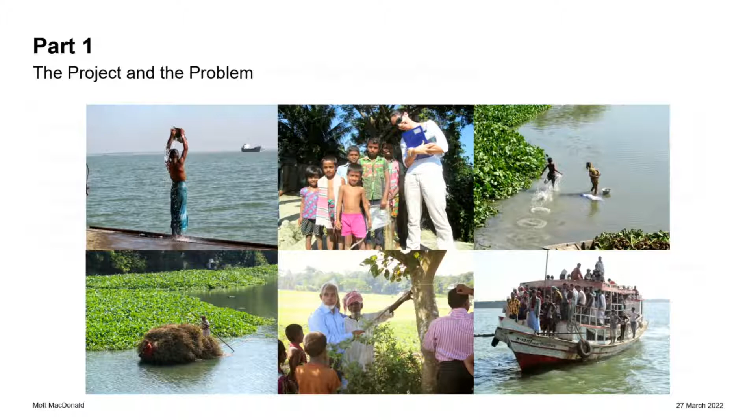I'll talk about the project first, and here are some photos from when I visited site back in 2013, to give a flavour of the countryside and the people. My favourite of these six photos is the bottom centre one, where we consulted the village elder, who showed us the level of the highest flood in living memory, which was used as a control on the hydrology and flood protection design for the project. We're not sure whether it corrected for the growth of the tree or not.

A little bit of orientation: you'll see Dhaka just to the right of centre in Bangladesh. This slide is from another project I've worked on, but I wanted to include it because it brings home the immense volume of water passing from the eastern and central Himalaya through the river catchments that run either side of Dhaka city. The river just to the right of Dhaka is the Meghna River, which is the source of water for the project.

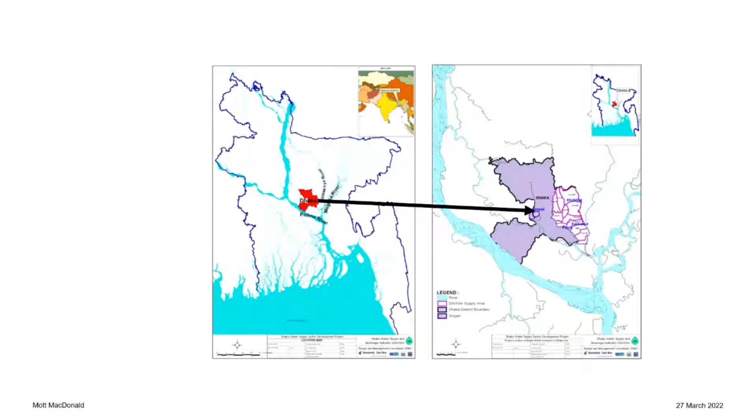Zooming in a little, the slide on the left shows Bangladesh with Dhaka shown in red, and on the right you can see in purple the supply zone for the client Dhaka WASA, with the lighter zone on the right showing the vast area Dhaka is expanding into eastwards.

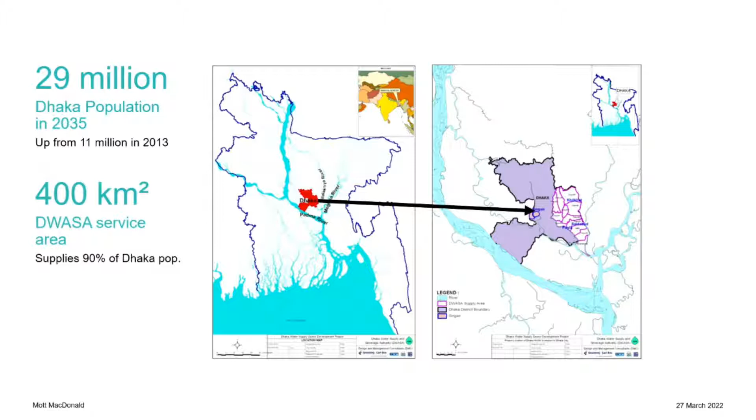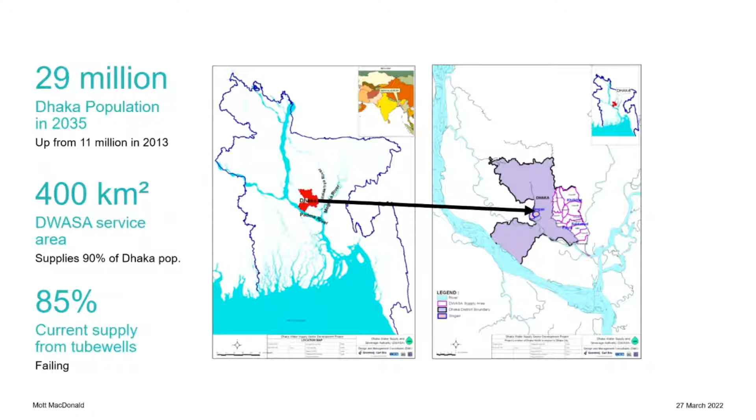The population of Dhaka is forecast to grow to 29 million by 2035, up from 11 million when I visited in 2013, and I can promise you it was busy enough when I visited then. The Dhaka WASA service area is 400 square kilometres, and they supply 90% of the population of Dhaka. At the moment, the water supply is predominantly from groundwater wells in an aquifer that sits underneath the city, and many of those are now failing either due to depletion of the aquifer or pollution of it.

So we have a short video that expands a little more on the background to the project and the social setting.

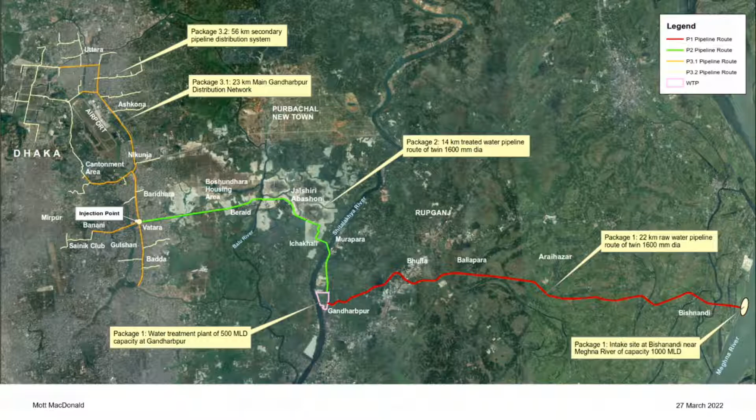Not going to dwell too much on this one. It's a satellite version of the schematic that I showed you - package 1 in red, package 2 in green, and package 3 in yellow. What I do want to point out here is the huge areas where Dhaka is expanding rapidly to the east. You can see all those light areas in the center left of the screen - huge amounts of hydraulic filling to get the land raised above the flood level for development and growth of Dhaka city.

Expanding on that a little more, if you look at the bottom two photographs, these are 5 years apart, and you can see the amount of reclamation filling that's gone on there. The two above show similar huge amounts of filling, but also you'll see how that filling and the evolving development plans over those 5 years actually made large alterations to the alignment of the pipeline. The magenta on the left was the original, and the red on the right is the final.

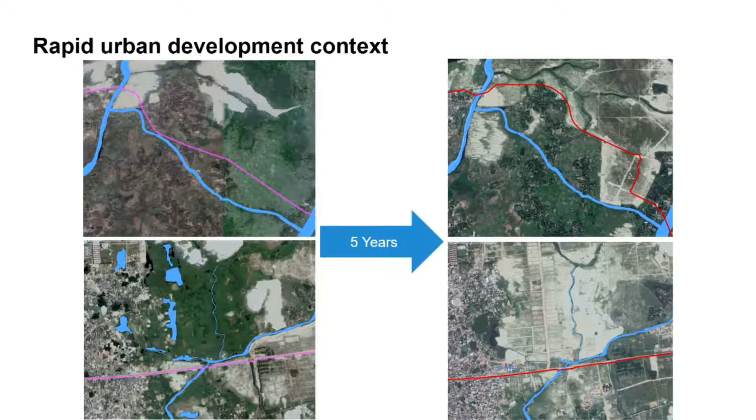Within package 2, there are 2 tunnel river crossings and shafts. These are standalone design and build packages, and we'll not be talking about those today, but there's lots of really interesting engineering, not necessarily seismic engineering, in those shafts and the tunnels.

Package 3, won't be talking too much about that this evening, and that's because Dhaka city is where Dhaka city is, because of something called the Madhupur clay and the Dupi Tila sand which is beneath it. The Dupi Tila sand is this aquifer that I referred to that supplies the groundwater and has done since Dhaka was first established. But because of the clay on top, the liquefaction risk for almost all of package 3 was found to be low. So won't be talking much about package 3 either this evening, just package 2.

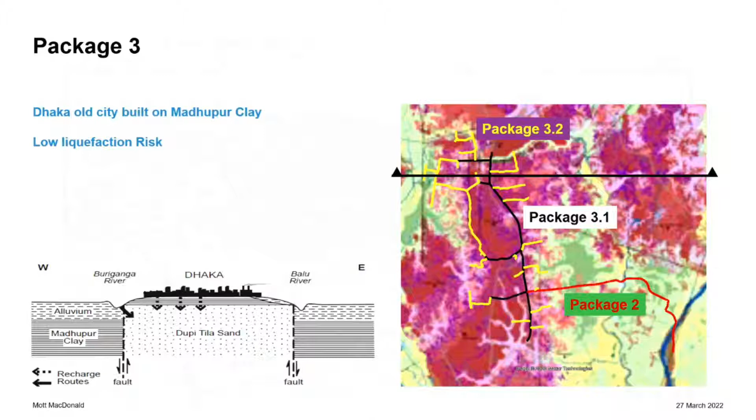So within package 2, what are we doing? Well, it's the twin pipelines I've already referred to, but they're buried within a trench excavation, which, because of the space constraints, will almost exclusively be in a sheet pile cofferdam. As the ground engineers for the project, we had to get the information to support the temporary works design of the sheet piles and also the dewatering.

Within the pipe, there's a trench backfill, so selection of suitable materials for pipe bedding and for general backfill. There's a real scarcity of any soil much coarser than fine sand within Dhaka, just because of where it sits in the delta flowing out from the Himalaya. So we had to specify the pipe bedding and backfill materials very carefully.

Ductile iron pipes are subject to corrosion, so we had to assess the corrosivity of the ground and the chemical nature of the ground to allow the pipes to be designed for the in-ground corrosivity. And last but by no means least is the liquefaction mitigation that we're here to talk about this evening - of the pipes, but also the pertinent infrastructure, air valves, washouts and the likes.

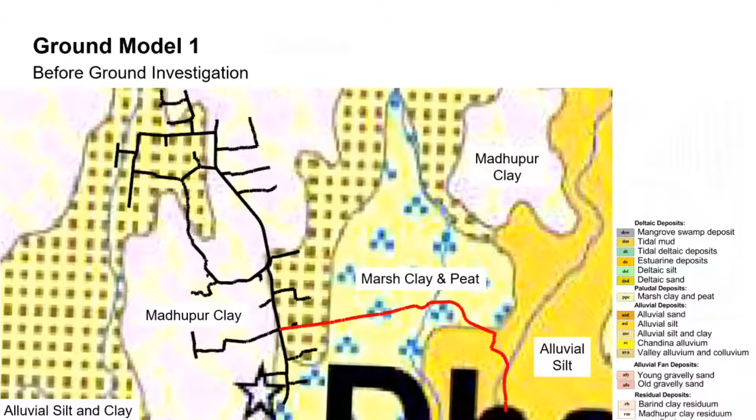In terms of the ground model, when we started out, we had almost nothing to go on. This area was almost completely undeveloped. What you're looking at is package 2 and package 3 overlaid on the geologic map of Bangladesh, which shows us the Madhupur clay and alluvial deposits, and tells us they're all Pleistocene in age, but not much more than that.

There's also a geomorphologic map, which is much more granular and detailed. Again, you can see the Madhupur clay in purple and the alluvials in green and brown that we were dealing with. But all we knew was that we would have sandy, silty soil to deal with.

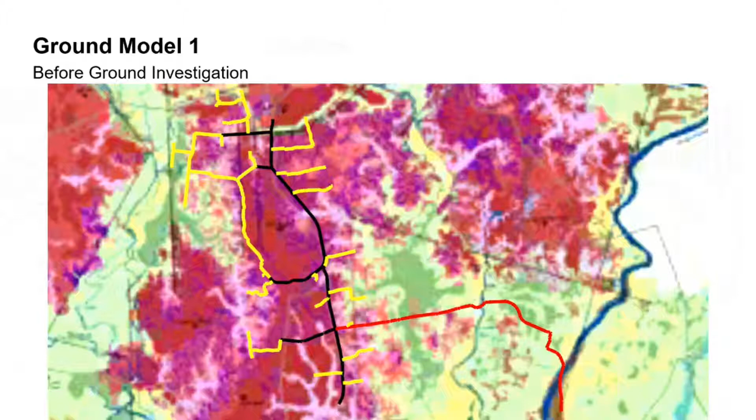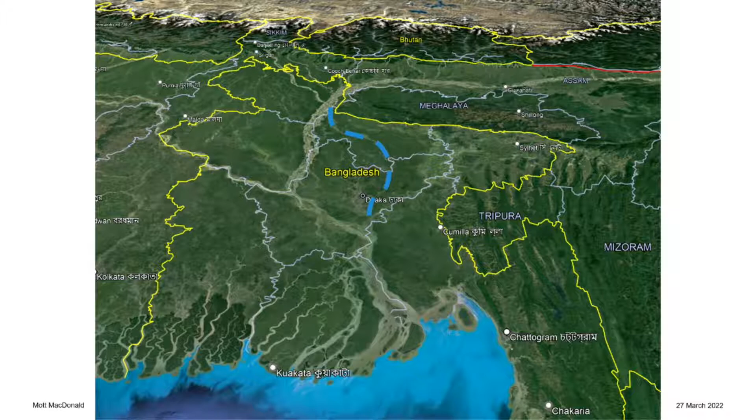I really like this Google Earth view into Dhaka because it shows the extent of Dhaka prograding from the Himalaya down into the Bay of Bengal. You can also see the Brahmaputra River, which currently passes to the west of Dhaka, used to go to the east of Dhaka. One morning everyone woke up and the Brahmaputra River wasn't where it used to be—it switched channels literally almost overnight.

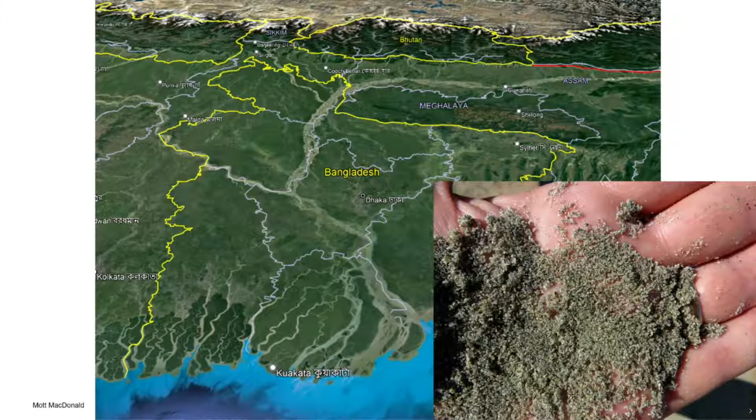What we were able to do—there's a picture of the typical material. It's a silty, fine sand with lots of muscovite and biotite mica in there, so it's quite a greasy feeling sand. It's not a great material at all.

Across that old Brahmaputra alignment, we managed to find a cross section in a paper, which pointed towards this pattern of an upper sand unit, a lower sand unit, and a mud unit in between the two. That became the basis of what we were expecting to find within the project area.

But obviously that wasn't nearly enough to go on to start doing any sort of serious seismic analysis, so we had to do a ground investigation that met the state of the practice within Bangladesh. We tried getting interest from international contractors to do something more advanced, but there wasn't really the appetite for international contractors to set up site investigation businesses in competition in Bangladesh.

So we went with the local market and had some pretty state-of-the-practice investigations by way of boreholes, SPT, permeability testing for temporary works design and the dewatering assessment, assessing the strata, getting grading curves of the uniformly graded fine sand, index tests on the clay deposits, and some shear box and triaxial tests to get shear strength parameters.

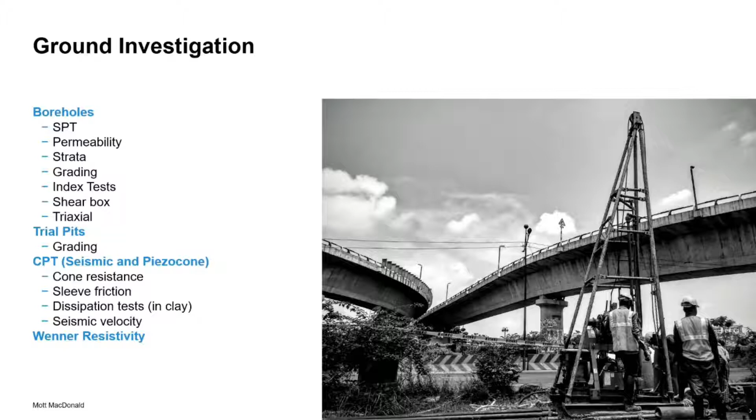So some stats: we did 36 boreholes, 34 trial pits, 19 Wenner arrays, and 111 CPT tests.

If you were fairly generous and said 3 days for a borehole, that would be a 4-month fieldwork period. If you were extremely generous and said 1 day per CPT, that would be 4 months of field work. 34 trial pits you'd definitely be able to do in a month, and 19 Wenner arrays again about a month's work. It actually took 6.5 months, and that was because of the problems we had with the CPT and the lack of experience and expertise.

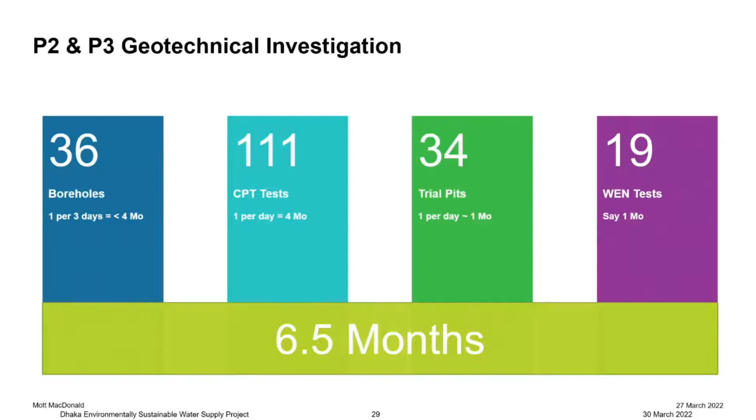We were having to do a reasonable amount of upskilling of the contractor to make sure that things were done right.

So just a quick refresher, this was the ground model that we had from what we could do, an upper and a lower sandy layer with a mud layer in between.

And here's what we found after our site investigation. So this is all of the holes and CPTs of the site investigation, with a water treatment plant, Gandapur, on the right-hand side, and the injection points at Norton Bazaar at the left-hand side. You can see that we found an upper loose sand layer, a middle clay and silt layer, and a lower dense sand layer. So it was really reassuring to see that at the grand scale, at the whole pipeline scale, we've got the ground conditions that we were expecting, although obviously there's detail within that picture.

Zooming in a little bit closer, these are the drawings that we produced. You can see the upper and lower sand layers in green and the middle mud layer in sand.

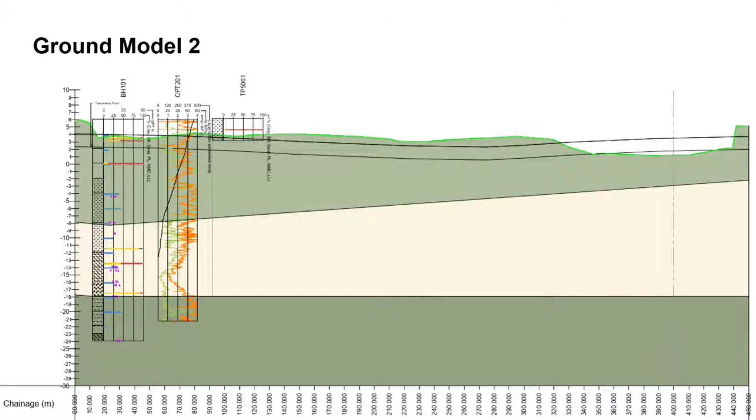Zooming in on the detail for the boreholes, the blue lines are the SPT, and you'll see all the SPT below 25 in that upper sand layer. The red, amber, green are the particle size distribution: green is clay, orange is silt, and red is sand. The circle, cross, and triangles are the Atterberg limits and moisture content. So we were able, at a glance, to get a really good feel for the conditions in the ground, and obviously you can see here that upper layer is really quite loose.

On the CPT, orange and green for cone resistance and skin friction, but also we plotted the calculated liquefaction settlement. Barnali will explain how we got to that in a moment.

We had a version of this on the office wall where we had the whole 18 kilometres of pipeline on a single cross section with all the liquefaction settlements shown on it, so that we were able to draw lines on with a big marker pen. I'm a great fan of doing things with marker pens on walls, as well as doing great things on the computer. So there you go.

That's my introduction to the project and to the ground conditions. I'm going to hand over now to Barnali to talk about the stuff that you're all actually here for, the seismic engineering.

Thank you, Jim. Really great to be back at ICE and present in person. Jim has already said that we have 100 people online, so at least people are listening to us. So the question then came, is Dhaka seismic?

Do we have some seismic challenges? This project was particularly very close to my heart for two reasons. My mother originally was from Bangladesh, but after the displacement that happened when the country was formed, she left her family and went back to India. So when I got a chance to travel to Bangladesh, it was for personal reason as well, as I could see my mother's side of the family and look at the land from where she came from.

So now coming back, starting to look at the seismicity of Bangladesh. Important to note here that from a tectonic point of view, Bangladesh is actually covered by three tectonic plates: the India plate, the Eurasian plate, and the Burma plate. The India plate is potentially moving at about 6 centimeters towards the northeast, whereas the Eurasian plate is subducting at about 25 millimeters per year. Similarly, the Tibetan plate is also subducting. So basically, the faults, if you look at the map on the left, you'll see Dhaka is fortunate in a way that there is no major fault line passing through Dhaka.

But it does have three major faults which are very important, to which I draw your attention. One of them is called the Dauki fault, which runs from east to west. It's about 300 kilometers long.

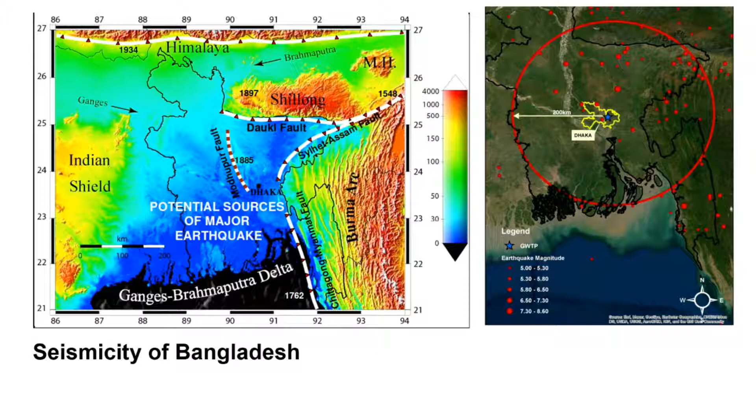But the problem was that some of these further events were felt in Dhaka city, and the record keeping was very poor. There was no proper catalog that you could use to do a detailed seismic hazard assessment study. The information to do this kind of study was lacking, and we're talking way back in 2014-15 when this project started. We were really struggling with quality of information at that point.

So we said, okay, let's look at what the Seismic Code of Bangladesh says. The Seismic Code, BNBC, was actually updated in 2012. According to that, Bangladesh is divided into 4 category zones: Zone 1, Zone 2, Zone 3, and Zone 4. Each of these zones is associated with a zoning factor. Dhaka falls in Zone 2 with a zone factor of 0.2 G.

Now, what this zone factor means is slightly different from seismic hazard in IBC or other codes. The zone factor is essentially associated with what they call the maximum credible earthquake, and the design basis earthquake based on these codes is about 2/3 of the maximum credible earthquake. So essentially the design criteria is that you design for the DBE, because it's an infrastructure project. There's no dual level design, mostly designed for a 475-year return period, if you consider it equivalent to Eurocode. That was what the code was telling us.

The code was last updated in 2012. We started looking at this from 2013-14 onwards. Recently there's also been some probabilistic seismic hazard assessment studies. The most recent one is the Zillur study in 2019, where you can see in this map there's 10% probability of exceedance in 50 years, so a 475-year return period. Most of the bulk of that is within 0.1 to 0.2 G, or slightly between 0.1 to 0.15 G. These are bedrock accelerations.

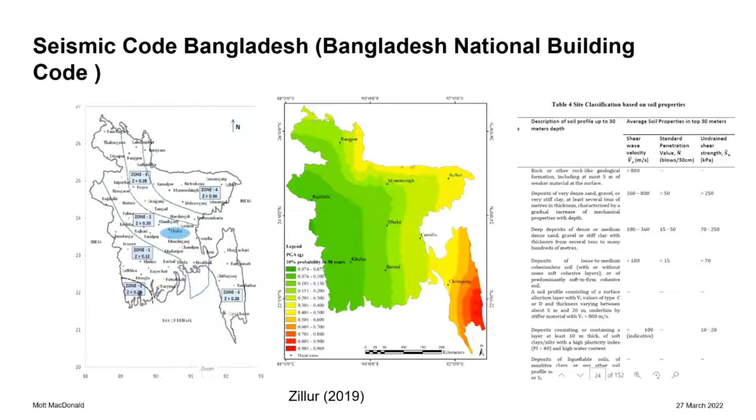So this gives us confidence that, at that time, the project requirement was to use the Seismic Code of Bangladesh, but we did a fair bit of desk study. Similar to that, following the seismic code, the next important thing is site classification, known as site class A, B, C, and D. This is very similar to Eurocode, classified based on the average shear wave velocity at the top 30 meters. For most of our site classifications, we are at site class D, where we have a Vs less than 180 meters per second.

Initially, before we started the project, there wasn't much discussion about liquefaction in Dhaka. The only reason I became aware of liquefaction in Dhaka was I'd heard about what happened at Jamuna Bridge, where there were some foundation reassessments because of liquefaction. So early in this project, I met the project director from Mott MacDonald and asked him, have you considered liquefaction? He said no, nobody has mentioned liquefaction to us — in this project documentation, there is no liquefaction. And that's how the whole process of investigating liquefaction started.

Then I started looking at the site investigation data, and what I was seeing was making me very concerned. Generally, for a typical liquefaction assessment project, many of my colleagues will know you can do it via SPTs or cone penetration tests.

You can look at cyclic simple shear tests, cyclic triaxial tests, resonant column tests, and in many cases, which we do routinely, we go for very advanced models in software like FLAC, Plaxis, LS-Dyna, Swandyne. We can do a lot of things when you have the data for liquefaction assessment. This is all very good.

But here we are in a country where people have no concept of liquefaction. They've built all these structures. There's not much infrastructure work that's happened. So in such an environment, how do you begin the dialogue of liquefaction? That's the kind of challenge.

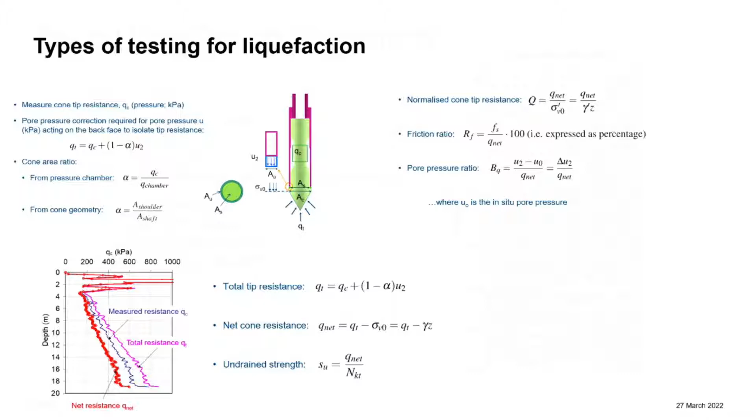We tried to schedule some cyclic triaxial tests, but again here the country context comes into play. None of the local facilities we visited had the facility for doing cyclic triaxial tests, so we would have had to import samples. So at the moment, we just went with the CPT tests.

This is the typical CPT. As Jim already showed you, we had about 111 CPTs. So here is again where your digital and your data matter, because it's one thing to collect so much data, and the second item is to discretize all of this data and understand what it's telling us.

I'm showing you one example of typical CPT data where you can see the cone resistance. Now remember, we are not trying to build deep foundations here, just pipelines, trench pipelines, with a maximum trench depth. You're interested in about 5 to 6 meters of the ground, and in that 5 to 6 meters we have that loose upper sand, which is the problematic sand for us, if you remember the ground model Jim showed us.

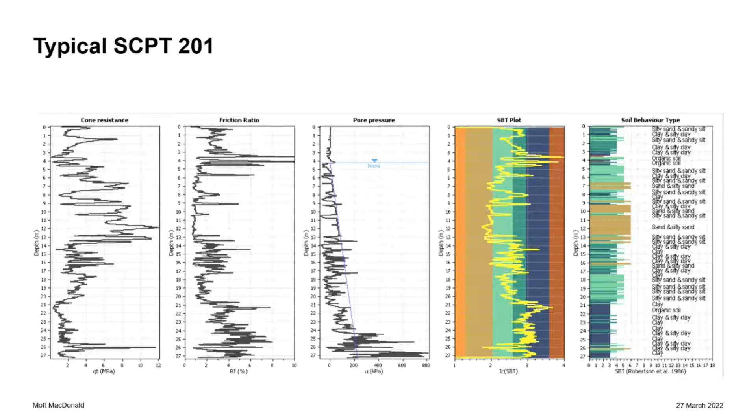At the top layers we generally had very low QCs, less than 2 MPa. The soil behavior index, using Robertson or similar classification, was particularly silty sand, sandy silts. That was the kind of classification we were getting. So not really an easy material to characterize.

We did liquefaction assessment through lots of spreadsheet-based methods, but in the end, because we had a lot of data, we decided to use the software CLiq. Whenever we used the software, we also made sure we did our own due diligence by calculating by hand and cross-checking all of that.

But in reality, what you are seeing here is a factor of safety. Liquefaction assessment is typically done by finding a factor of safety, and you typically want a factor of safety greater than 1.25. But all the bits in red here are telling you that the top 6 to 7 meters is liquefiable for this particular site we picked up.

The liquefaction assessments were typically done for a magnitude 7 earthquake. We also did sensitivity for magnitude 6.5. The peak ground acceleration is one of the inputs for our liquefaction assessments, taken as 0.18 G. The numbers in the code were for MCE, and design checks were done for the design basis earthquake, also accounting for soil factors, so the PGAs were approximately 0.18 G.

Because we also had shear wave velocity measurements, we could classify the site, and most of the site was classified as site class D. The important point to note here was the CPT data.

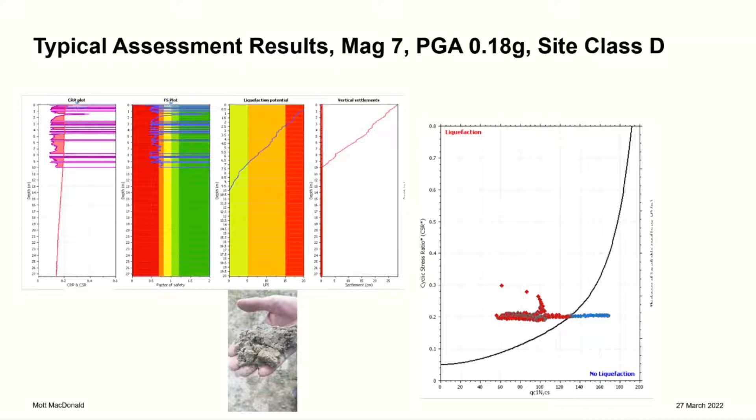I like this photo, mainly because looking at it, it's quite difficult to say, is this going to liquefy or not? It's just not one of those obvious ones.

This is very scary - this is what I used to scare everyone in the project. You can see we had about 43 of these CPTs in P2, and this shows the probability of liquefaction report. Most of them, almost 75%, were showing a probability of liquefaction more than 80%. Whereas only some people who were still doubting said, oh, the bottom ones, the green ones which show low probability of liquefaction, that was about 12%. So that was the number I was asked - how many don't show liquefaction? And if you're looking at the image, that's the overall probability for liquefaction. So that was bad news.

Then we said, okay, let's not panic. We had to calm the project team, the huge project team. Our strategy for trying to calm the project team was to look at the liquefaction-induced settlements and the differential settlement across the route. So what you see here, the image on the left is actually the liquefaction-induced settlement for all these CPTs, with the knowledge that these numbers are okay following best practice, but they still are not the main truth or the only source of truth.

We marked the areas with big reds where we knew that out of the 14 kilometers, we had to do some interventions. We cannot have the pipeline and the trench there. And then we looked at all of the different possible cases - how could we do 14 kilometers of liquefaction remediation? It's too much. So we had to come up with some optioneering, which is what I'm going to focus on.

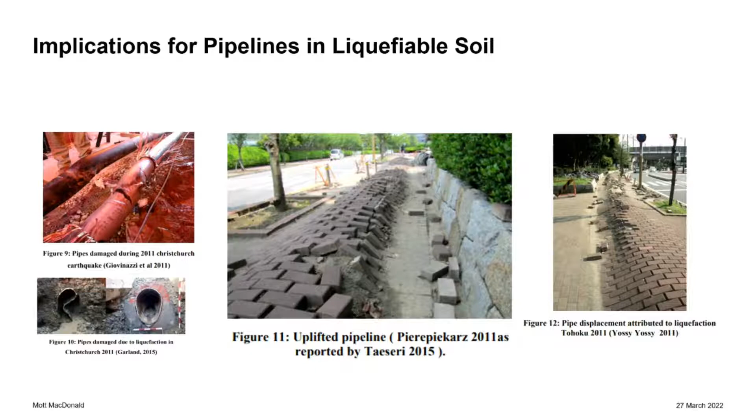So that was the time to go back and look at ground improvement for liquefaction. There's a huge range of methods for ground improvement for liquefaction. You can look at densification, where you have vibroflotation, vibro-rod methods, dynamic compaction, compaction by explosion, compaction grouting. Then the other part is reinforcements - stone columns, compaction piles, deep soil mixing - all of these are quite popular, and the first choice is stone columns. Then you go to more sophisticated ones - permeation grouting, hydrofracture grouting, jet grouting, compaction grouting. And the last solution, one of the most dramatic liquefaction solutions which I recently saw in one of my other projects, was everybody said the problem in liquefaction is because of the water table.

Just lower the water table. So they were considering lowering the water table for the entire city because they wanted to reduce the risk of liquefaction, which I thought was extremely extreme.

But then the other option is drainages. In many places, people are considering drainage, actually trench. So looking at all these four options, we said okay, there are a wide range of methods, but what is suitable for our site? That's where it comes down to what is suitable for the particular site where you are working, and the country and context. I'll talk about this in a bit of detail.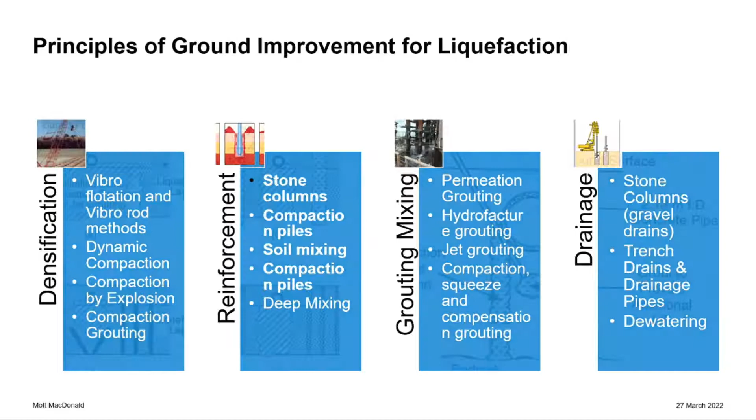Also, we try to look at, are there any case histories where you have pipelines in liquefiable soil? What has been done before? What is in the published domain? Looking through vast troves of literature - there may be more now. Remember, this was done in 2014 and 15, so there might be more cases now.

But generally, people have kind of tried to form a bridge where you can have a soil cement wall, stop the liquefaction, where you have the pipe, do some sort of ground reinforcement below the pipeline, and normally use some compaction grout. Those are the kind of solutions which are available in public domain.

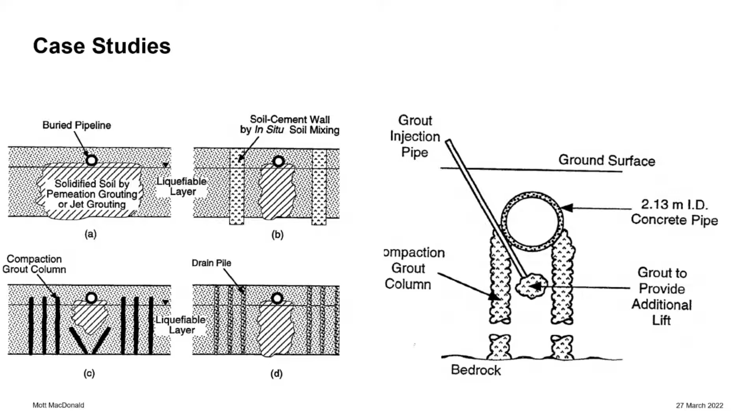What have they done in Bangladesh? Or did they have any experience? So this is what we found, that sand compaction piles has local experience in Bangladesh, because there was this problematic project in Bangladesh, the Padma Multipurpose Bridge Project, which if you Google, you will see that project ran into a lot of problems. One of the methods of ground improvement that was tried in that project was called sand compaction piling.

So why SCP? Because as Jim mentioned, they have got lots of sand, so they don't have to transfer the sand. It's locally available material, so it's kind of useful. And there was some very good case histories of this, which was seen in the Tohoku earthquake.

In the picture that I have on the left, you see an improved area and unimproved area. Anybody who works in ground improvement, they always want to show this picture, because obviously the improved area was on SCP's sand compaction piles, and nothing happened to that after the Tohoku earthquake, whereas the other area where nothing was done - so it's a good one.

So typically the sand compaction piles are used for clays, and it can be used for sands. It has been popular in Japan, very, very popular in Japan. In fact, there is a book which I'll just talk about, which deals with sand compaction piles. For sands, it's mostly used for increasing the bearing capacity, for reducing the settlement, and for preventing liquefaction. These are the main bits where it's used.

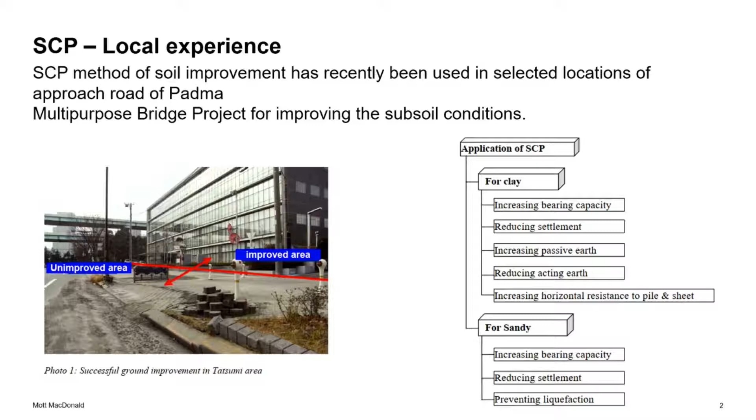I think many people in the audience, or people who have seen SCPs, might know this particular slide. This is from the book that I was mentioning - Kitazume's 2005 book on sand compaction piles. He has accumulated all the case histories of SCP usage, and most of these usages are actually coming mostly from Taiwan, Japan, and the high seismic areas.

I will not go into detail, but it's important to say that while this method - if you are coming to very, very stiff soil materials, then obviously people also use air. The air is used to break up the surrounding materials. In a selected way, sand is pumped into this, and the sand compaction piles are created.

Typically, the design of sand compaction piles follows the same principle as stone columns, and you use what is called the area ratio - how much of the soil you want to replace by your sand compaction piles - and you have the spacing of the piles.

Any such type of testing needs - ground improvement is obviously something you need to test on the site before. So one of the things that we specified was that if we thought sand compaction works in the site that we have, then we also specified that prior to using it on site, there should be a test trial to know the effectiveness. This is usually done by measuring - because it came from Japan, they put a lot of emphasis on the SPTs - so this will come from measuring the SPTs before and after the SCPs. Normally the diameter of the sand compaction piles is about 0.6 meters, that's the kind of 0.5 to 0.6 meters. You're actually reinforcing the ground, allowing liquefaction pressures to dissipate, more excess pore water pressures to dissipate.

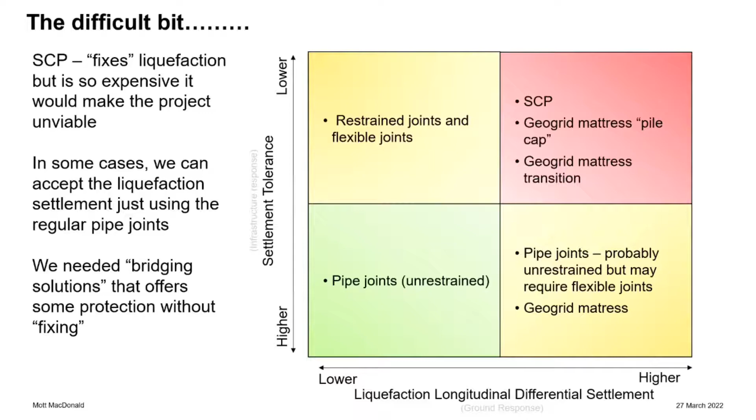And this chart became quite famous, because what we're trying to do in this chart is show where along the entire length of the pipeline we are going to do some interventions.

We said, what is the maximum differential settlement that can be tolerated by restrained and unrestrained pipes? We put a limit of 250 millimeters. In reality, they can tolerate more, but we had to cap it somewhere. This 250 millimeter limit is generally applicable for long continuous pipes which are not connected to any hard spots such as chambers, shafts and others. But where we had chambers or areas connected to hard spots, we limited it to 100 millimeters.

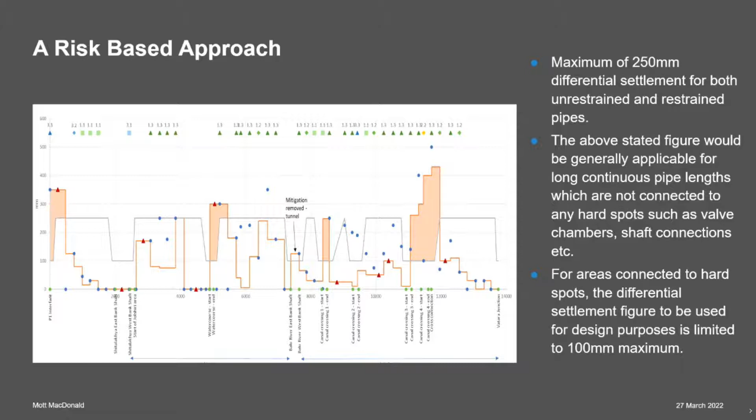So obviously we had to come up with a decision workflow. At the time we were delivering this project it wasn't simple, but the main question was: is the pipe restrained? If not, are residual movements manageable within the angular deflection of the pipe joints? If yes, no further mitigation required. If not, we need to do geogrid mitigation.

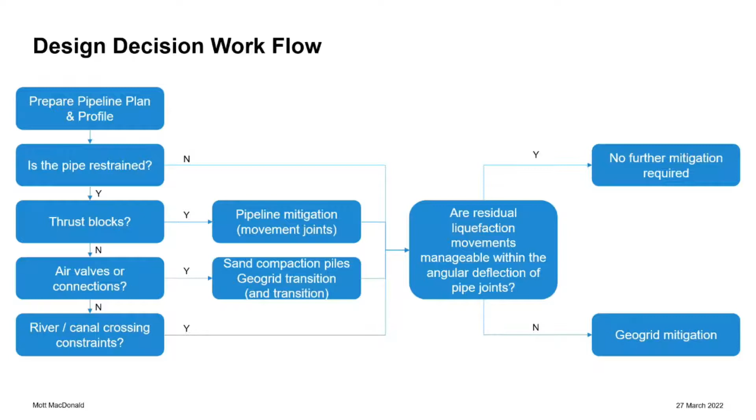This is quite a detailed one. We don't want to go through everything, but essentially there is a logical manner in which we develop the solutions. So just going to talk about the first one: is the pipe restrained? If not, what happens then?

If we have unrestrained joints, accept liquefaction settlement, we're just using regular pipe joints, because pipes on their own can deflect. For example, if we have a 100-meter pipe length, peak ground displacement at the center of 400 millimeters can be accommodated by the pipeline without loss of any containment, because remember, we are using ductile iron pipes which can deflect because of their shape and tolerate a little bit of settlement.

So if it's within that limit, we allowed it. For liquefaction design, we assume the target settlement figure is maximum, as I explained earlier, about 250 millimeters. So for these bits, we didn't have to do anything, we automatically made use of the properties of the pipes we were working with.

The second one is the question where we have to do pipeline mitigation, through movement joints. Here again, we started looking at each section of the pipe, which requires a thrust block to be restrained. Then there's a movement joint fitted at each end of the restrained section to manage differential settlements to a tolerable limit of 100 millimeters.

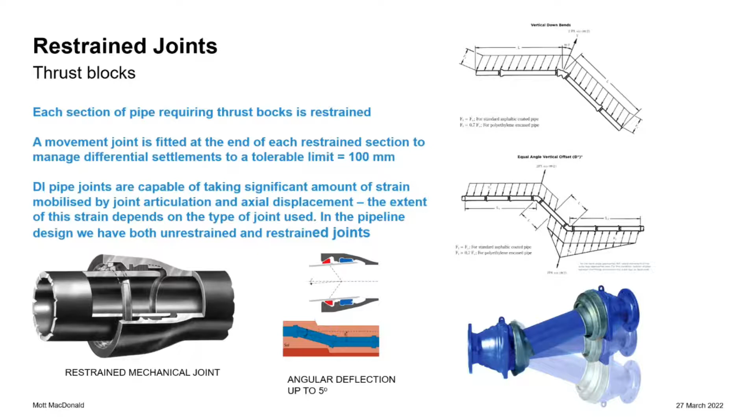We know that the ductile iron pipes are capable of taking significant strain mobilized by joint articulation and axial displacements, and the extent of this depends on the type of joint used. In the pipeline we decided to have both unrestrained and restrained joints. So taking the inherent ability of the pipelines and the restrained joints and movement joints, we made sure that this liquefaction induced movement is actually absorbed by the pipeline in the design.

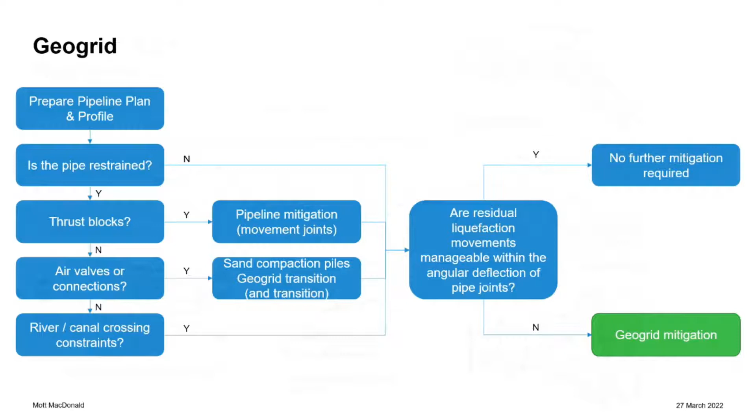Now, what about the geogrid mitigation? Geogrid mitigation was our second order solution. The standard geogrid reinforced mattress, this is Jim's favorite solution, provides tensile strength to the base of this.

So we have twin pipelines, and then we have the geogrid at the bottom. Remember, we are trenching everything, and once we trench this, we also have some geogrid wrap around, which provides tensile strength to the sides and also pull-out resistance for the base. So we wrap it around with the geogrids. The geotextiles prevent the migration of the backfill into liquefiable soil, providing a bit of confinement. If the soil below does liquefy, it is contained within this.

So this was a standard geogrid detail, and it's quite an easy solution because ultimately this pipeline is going to be built by local people with local expertise and local skills. Laying down lots of geotextile wrapping is easy, rather than trying to do something very sophisticated, which probably brings a lot of problems.

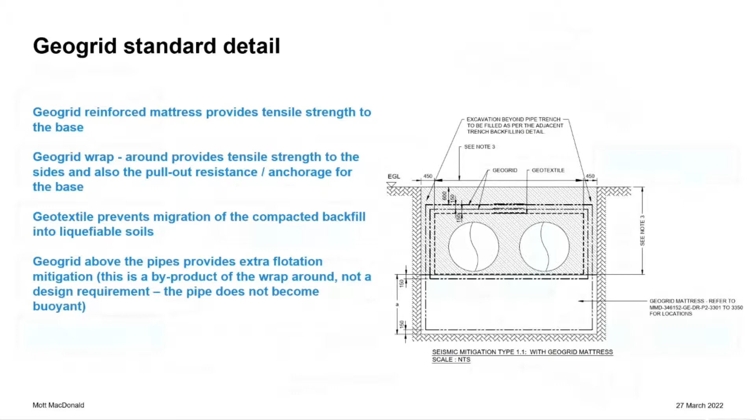Then comes our standard sophisticated solution, the sand compaction piles, which we used for air valves and other places where we had hard spots, and around transitions, because we can't go directly from the geogrids into the sand compaction piles. We also needed a barrier of transition to manage the liquefaction in the surrounding areas. So in this case, the standard solution that you saw in the geogrid all remains.

In addition to that, we have the sand compaction piles. We designed the sand compaction piles, mostly 600 millimeters in diameter, with a spacing of about 1.5 meters. But at local places where we were doing the transition, we had the sand compaction piles at a larger distance.

The geogrid mattress from this becomes the pile cap to support the block of the pipe and engineered fill above the sand compaction piles.

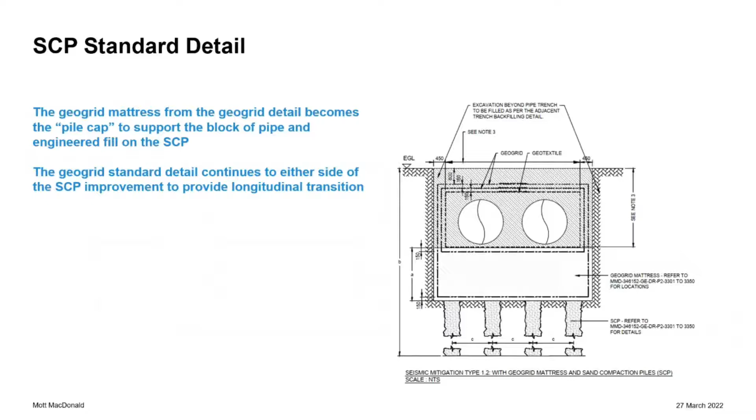So basically, the geogrid standard detail continues on either side of this to provide the longitudinal transition. We didn't just do it at that area and leave the sides, because from past experience of liquefaction, we've seen when you do ground improvement for one location and leave the sides, it fails, and that creates an imbalance in the entire system. So we wanted to avoid those kinds of sudden jumps or hard spots.

This is the kind of drawing that we issued. Ultimately these drawings will be used to design, to look at what sort of mitigations we have. For example, we've classified the mitigations 1.1, 1.2, what kind of mitigations we're giving, what is the dimension, how far do you extend on either side of the mitigations, and what is the liquefaction-induced settlement. Everything is there in the drawings, so we spent a long time doing them so they could become useful.

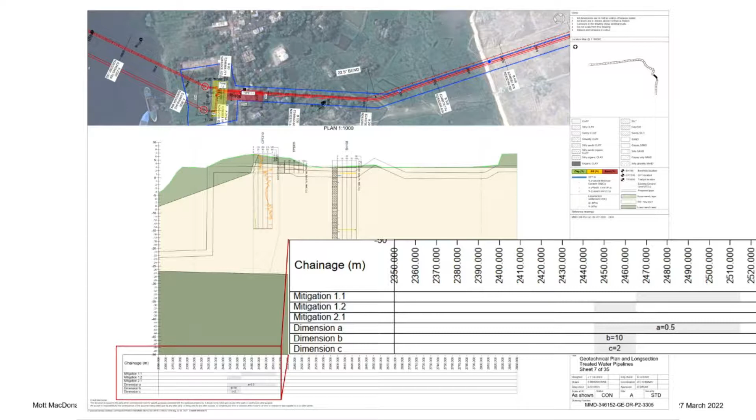Ultimately, we ended up having mitigations for those areas where we had hard spots, some areas where, if we had to do Barnali Avenue which we'll explain later, were complicated. We decided this carefully, because remember, none of Dhaka has had any liquefaction mitigations before. So if the surrounding areas are not mitigated, that's not very good for us either, even if we've mitigated our own site.

So we've talked about a lot of things for you to absorb, but it's easier if you have some cartoons, because the cartoons will actually show it. So we're just going to show you one very nice video, and I don't have to do any talking.

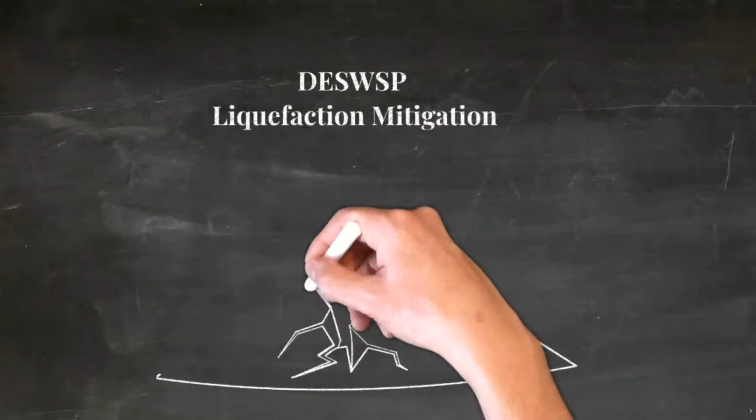This video short describes the design of measures to mitigate the effects of liquefaction of the soil for the pipelines of the Dhaka Environmentally Sustainable Water Supply Project.

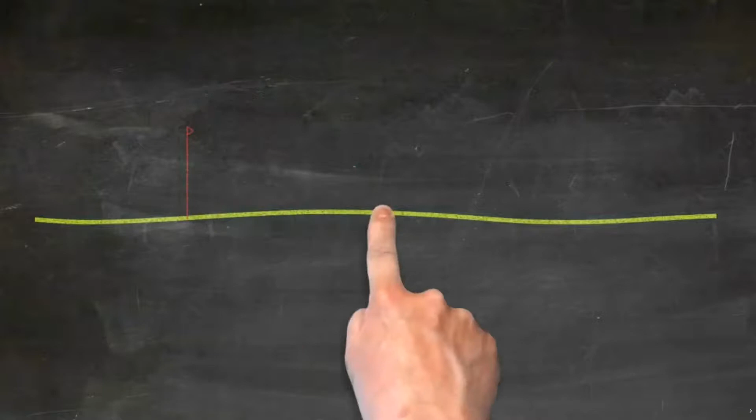The first area looks at Barnali Avenue, where the pipeline will be installed at the toe of an existing embankment that carries the road Barnali Avenue. The site boundary is very close to the road, and there is a zone of liquefaction that the seismic estimation has shown will be between about 3 to 5 metres thick.

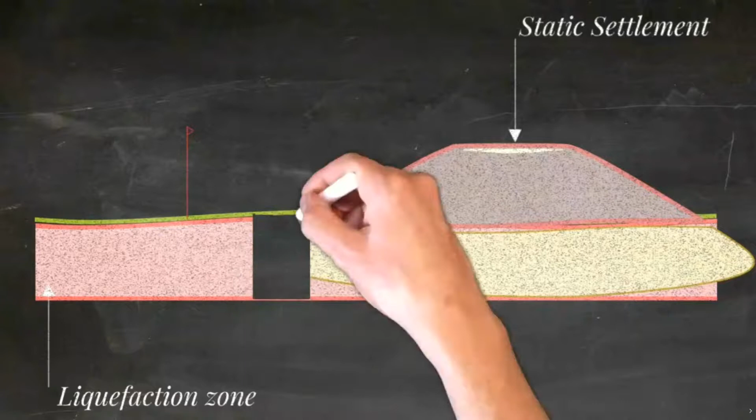The road at the moment is on an embankment around 5 metres high, and the soil beneath it will have undergone some static settlement, but no dynamics from the earthquake. As far as we know, no measures were installed to mitigate the effects of liquefaction for that embankment. The new twin pipeline will be installed at the toe of that embankment.

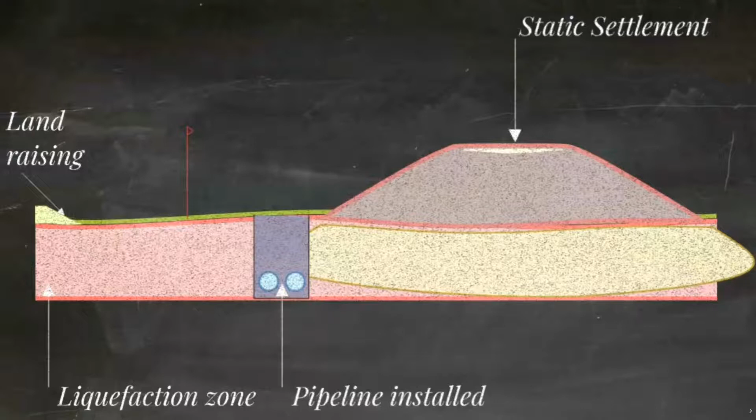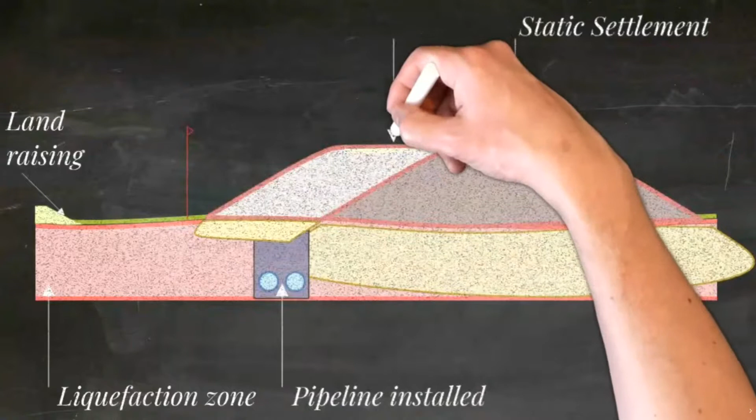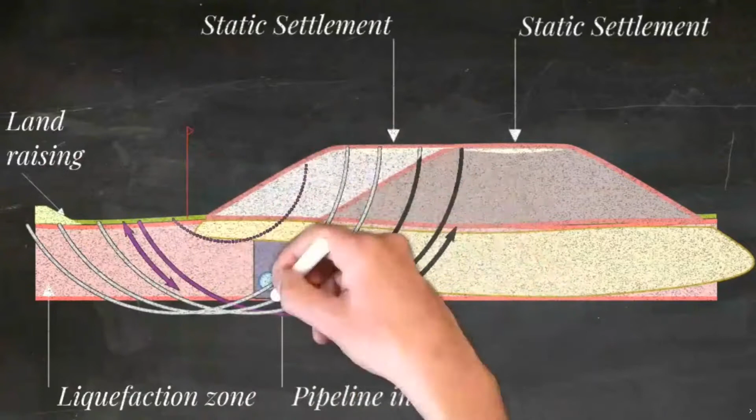The main problem will be an earthquake during the period where the Barnali Avenue fill loads the liquefaction zone and results in shear surfaces as shown. These would take out the pipeline, although that will be mitigated in the long term by counterweight fill as the land filling reaches the embankment.

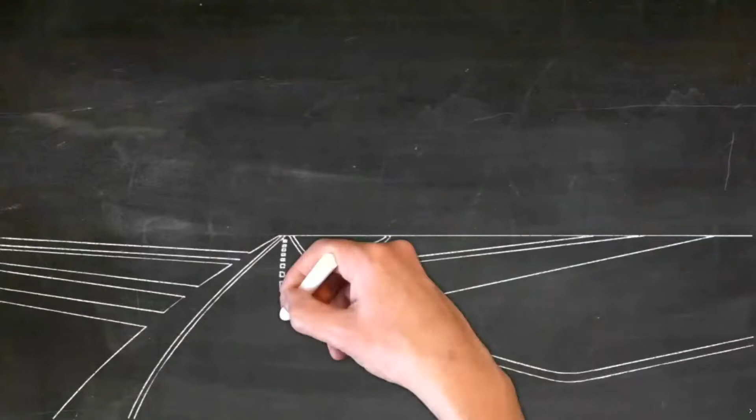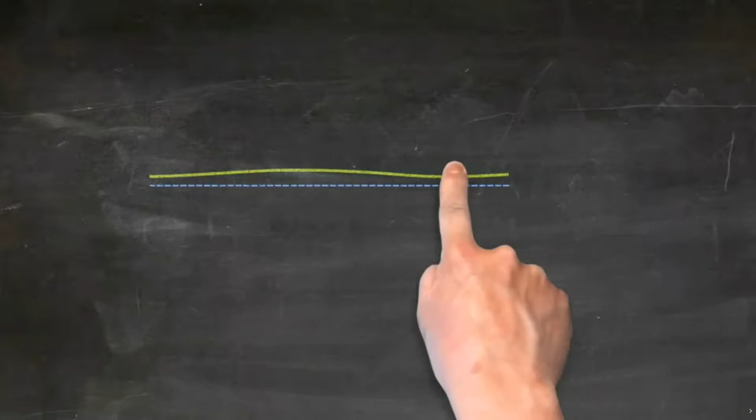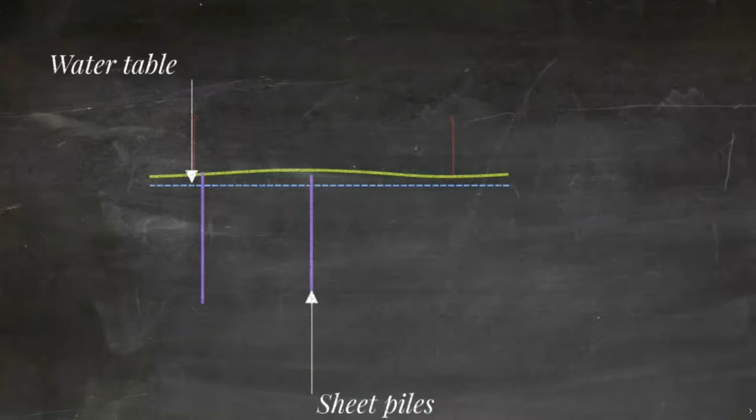As well as Barnali Avenue, there is also general trench construction, which includes phase 2 of the works. Here, the pipe is excavated below existing ground level with no fill to either side. Water table is typically very high, and because there's a narrow corridor for construction, the pipeline will be installed in a temporary excavation supported by sheet piles. Those sheet piles will be supplemented by dewatering wells in order to draw down the level of the groundwater below the required excavation depth.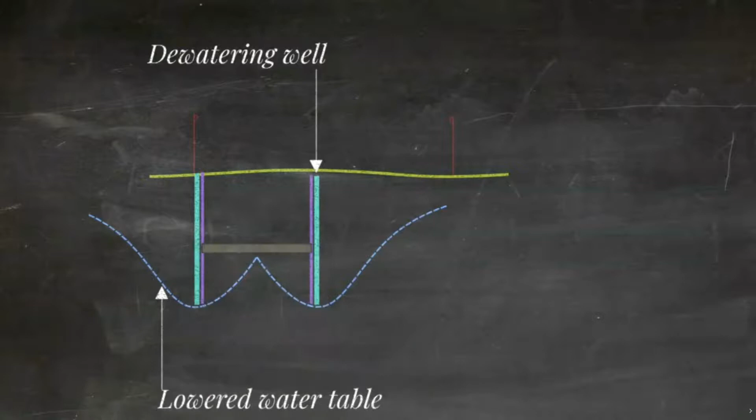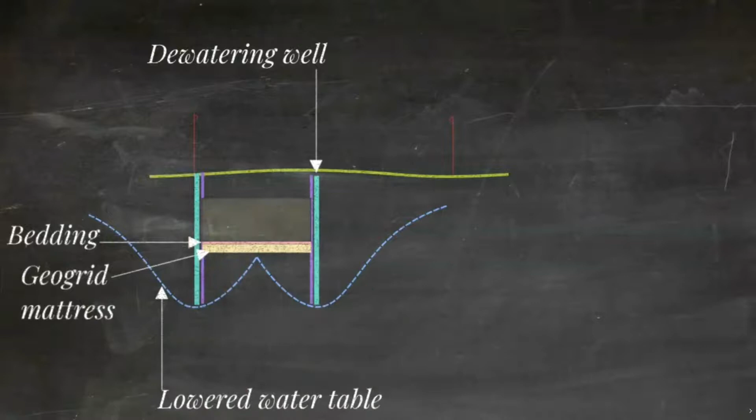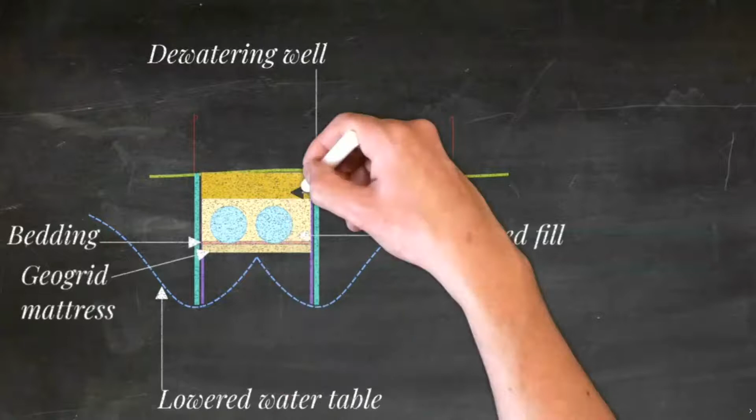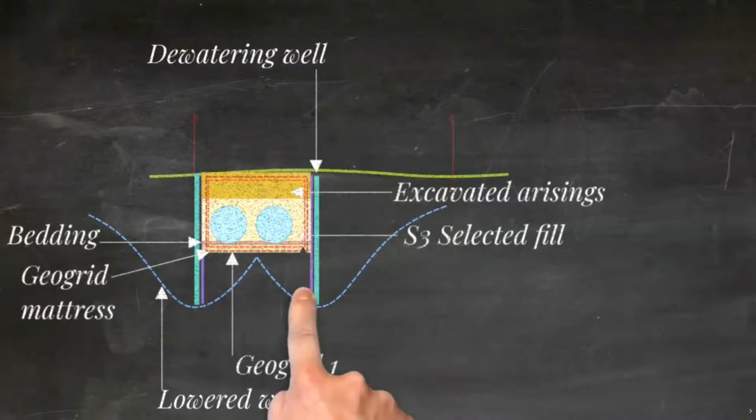First of all, a mattress is installed at the base of the pipeline. This is to provide protection against liquefaction. Then there's a pipe bedding layer, some selected fill that goes around the pipe, and ultimately at the top, reused material, unselected, that's been excavated from the pipe. There are two layers of geogrid that provide the liquefaction mitigation by providing tensile strength around the block of engineered fill so that it remains intact during an earthquake event. There's also a geotextile to prevent migration of fine material in or out of that block.

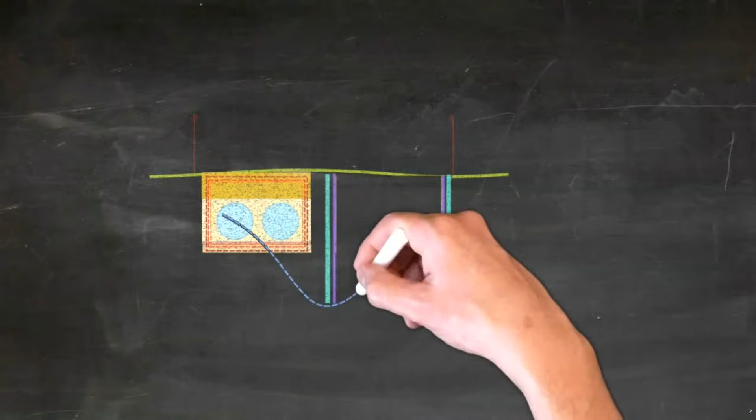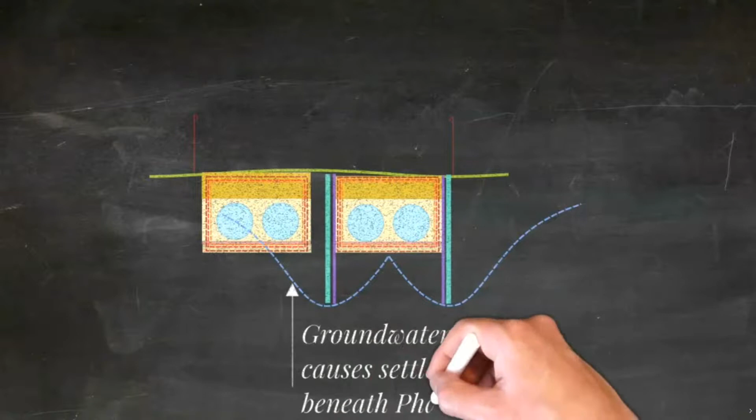When it comes to phase 2, the existing pipeline will already be in place when the sheet piles are installed and the water table drawn down. This will result in some settlement on the pipeline, but all of the static settlements and dewatering settlements will be significantly less than that required for liquefaction mitigation, so these are not considered to be a problem.

But there is a slight challenge on phase 2, that there may not be the space for a temporary spoil storage.

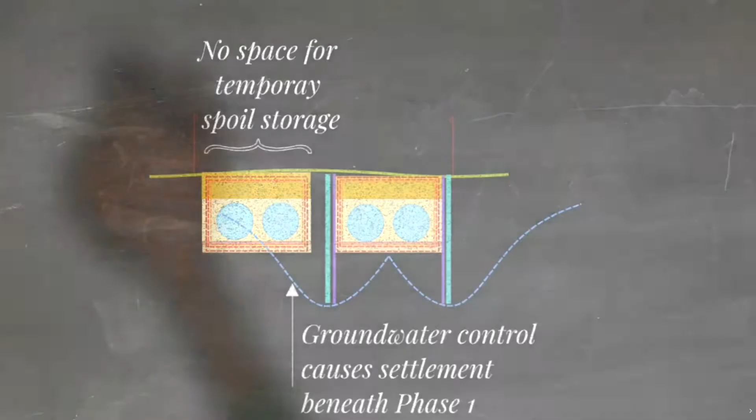So I think you've got a good fair bit of idea about what we were talking about, because you can do great design, but if you don't know how to construct and have buildability, then we are always in a problem. I'm just going to leave the state at which the project is now. Phase 1, the P1, is under construction. Our part will be constructed.

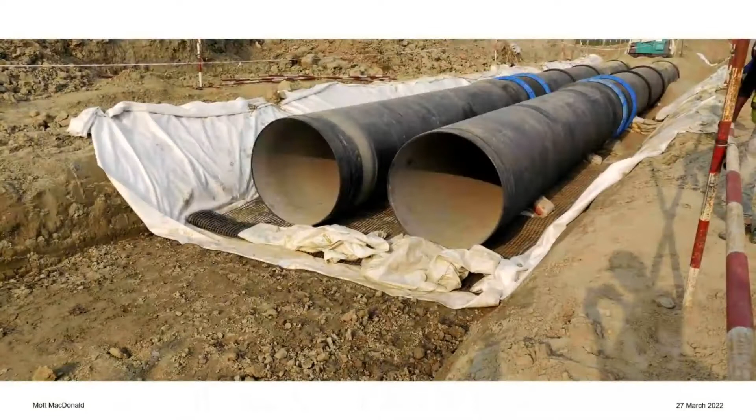So these are some photos. Now I've been looking at drawings, you look at 1.6 meter diameter pipes, but this is how big they look and how big the trench is. You don't see, unless you see it on site, you don't get an idea. On paper, you draw circles and they look like small pipes, but when you actually look at these photographs, this is how they look like.

This is some site photographs, as you can see, trench preparation going on and men at work. This is where the country and the context and the level of local skill and expertise is very important while we are sitting here designing things.

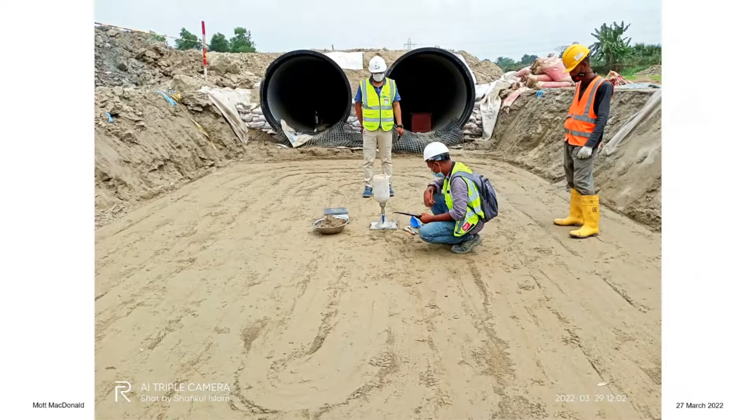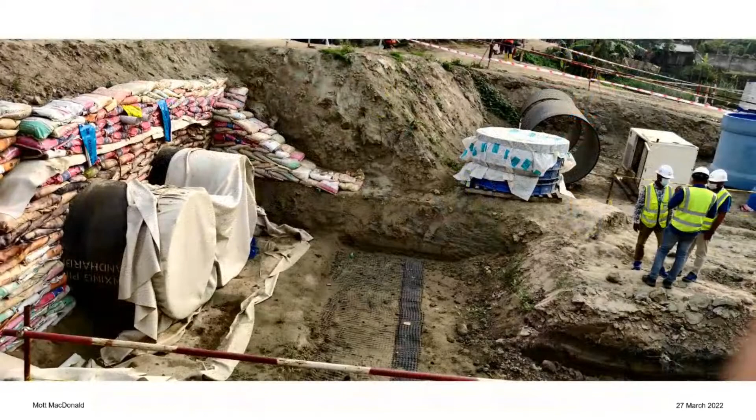Again, you can see the height of the pipes. Looking at the person standing next to that gives you an idea of how big and wide this trench we're talking about. This is again some other construction photographs.

Which kind of brings me to the key message. What did we want to talk about by talking about this project? We wanted to try and bring to your attention that liquefaction is a challenge for pipelines in Bangladesh because we've got high groundwater, moderate to high seismicity, and fine sands and silty sand soils. The extent of liquefiable soil to the east of Dhaka is considerable. It has now come to my attention that many other projects in the area, following on from this project, have now started considering liquefaction, which I consider is a big success for all the other projects in the region.

Now, to fix it by ground improvement would make the project unviable, so we thought that settlement-intolerant infrastructure must be fully protected. There were many options, but we decided to go with SCP because it's a local norm, and for very large areas, deep soil mixing or piling may also be appropriate. For other pipeline sections, it was tolerable to accommodate liquefaction settlements, so we did regular pipe joints in open ground, and movement joints for restrained lengths beneath rivers or at thrust blocks.

Liquefaction mitigation is multidisciplinary—only one of the five workflows is seismic. It took us a big team, in-country experts and expats, and as I said, there's a huge number of people who have worked on this project. I want to acknowledge our team leader, Nigel Ostermans, and Chris Preston, who was our project director. And there's a lot of people still on site in Bangladesh, our colleagues there, because delivering such an interesting, exciting and challenging project is not possible without having a good team.